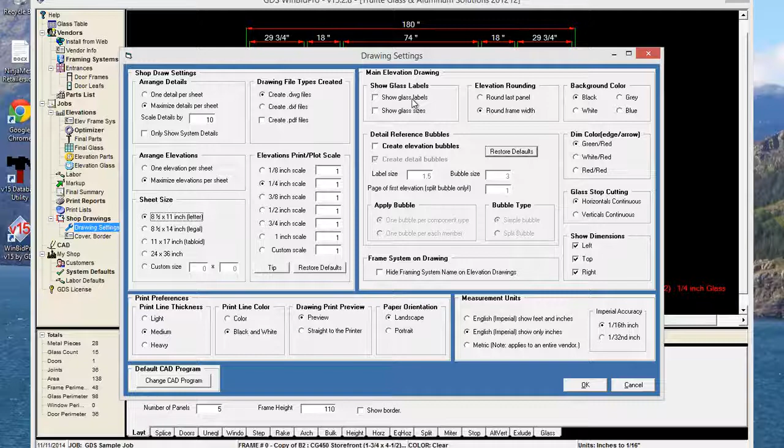And then there's all these other settings that have to do with the bubbles and the colors. Let's see, just different things with the drawings. This is showing the glass labels on the screen,

Glass sizes, things like that. So the main thing we're interested in is this shop drawing settings area right here. So let's leave it at that, quarter scale, DWGs, 8.5 by 11, and we're going to maximize both elevations and details. So we're using the Trulite catalog right here, and they have a good catalog that's configured very thoroughly with details, etc. So I have a job here with 3 elevations, and there's a pair of doors there, single door, not too big, about 200 inches wide on that one, 150 on that roughly, and 180 on this.

So here's what's going to happen if we do shop drawings. We're going to click on shop drawings, and that's basically going to compile these drawings and arrange them for the drawing files, the CAD drawing files.

So let's do that. Now the problem is, since 8.5 by 11 is our paper size, it knows that it can't fit all those at quarter scale on one sheet. So we're kind of not getting much advantage for our maximizing elevations per sheet.

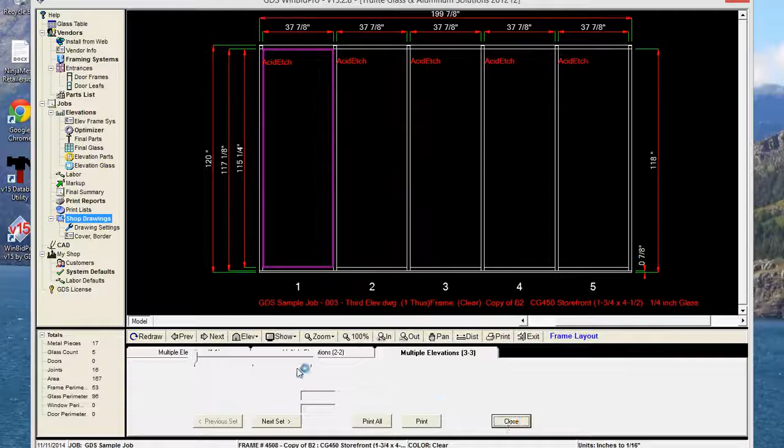So just to show you the difference here, let's go back to drawing settings and say that we have an 11 by 17 printer. With elevations of this size at quarter scale, it should be a different story when we hit shop drawings. It should be able to combine these now and put them all on one page.

So here they are on one sheet. It's basically because our paper size grew, the elevations can fit better. And then we can go to the next set.

And you'll notice this in a lot of the details for different manufacturers. It's kind of a challenge working with details from different sources because it's hard to tell what scale they were created in.

Especially when they're DWG files. We don't have a lot of access to the metadata, the actual information in the files. So I guess we're kind of treating them all like they're the same size, but in actuality they're not. So sometimes they'll show up tiny, sometimes they'll show up normal. It just depends on what the source is, which is the whole reason why learning your own CAD program is

a huge thing, because you can basically fix this. You can say, I want to scale this, or I just resize them to however you want, and then they look exactly how you'd like. So you're not having to work with something like this. That's one of the reasons it's important to know a CAD program.

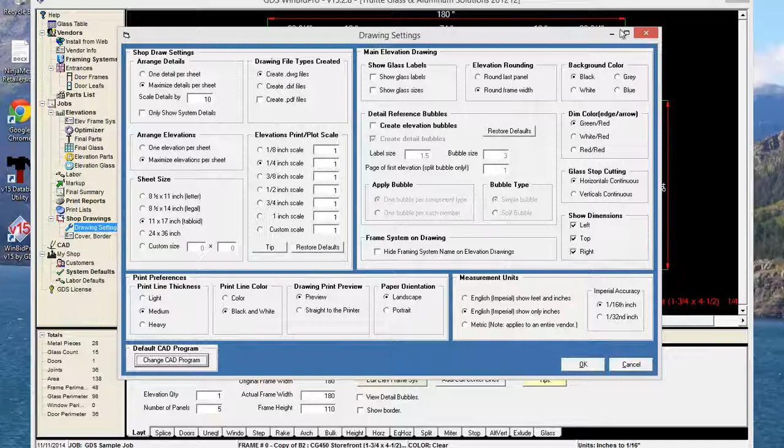Now this is a free program that the company we buy our software tools from gives us, the ability to draw elevations in our program. They have a little free program that they put together. The problem is the company's in Greece, and although they have a good tool, their little CAD program has some problems, and it's hard to get any help from the people in Greece. So it works, but it's not ideal.

So here's what that one's like. The way you open up the CAD program is just this little CAD button here. And you may know this already, but whatever drawing is showing on our screen here will get opened when we hit CAD. So this is the free program, we call it VCAD because we had to change it a tiny bit. But it's got all the tools and everything, but unfortunately there's some things that don't work right.

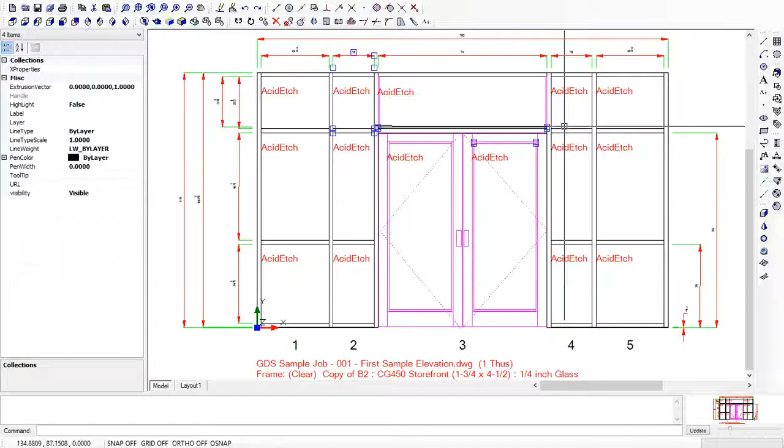It's not that intuitive to me. I'm clicking on objects here, which is good, or entities they call them in CAD. So if you're looking at just an elevation drawing, everything's in vectors, I guess. Horizontals are like little rectangles, verticals are little rectangles. Everything we draw is kind of rectangles, unless it's a rake, and you get into more angled stuff.

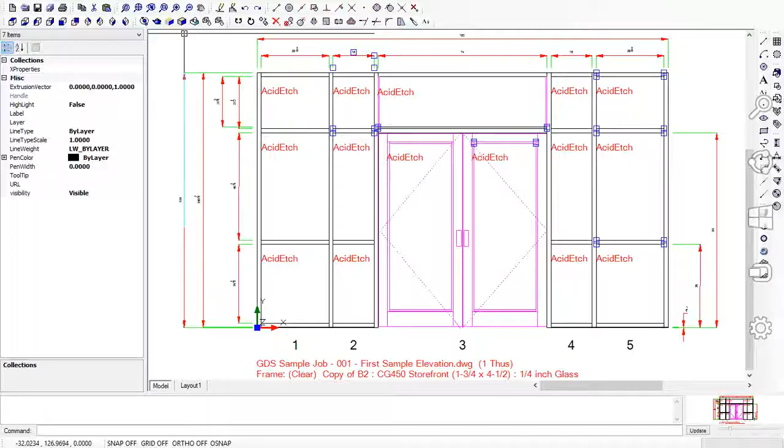This is what it looks like when you open the free one that's included with WinBidPro. Like I say, I'm not that pleased with it. I know it's better than nothing, but I would rather use something like DoubleCAD, so that's why. Sorry about that, I hit the wrong button. Let's go back one more here.

So what we're going to do, let's say we've installed DoubleCAD. It installs like any other program - you download it and install it. I want to actually tell GDS or WinBidPro that I want to use that DoubleCAD program. So I'm going to browse for it. And I remember that when it was installing, it put it in the Program Files x86.

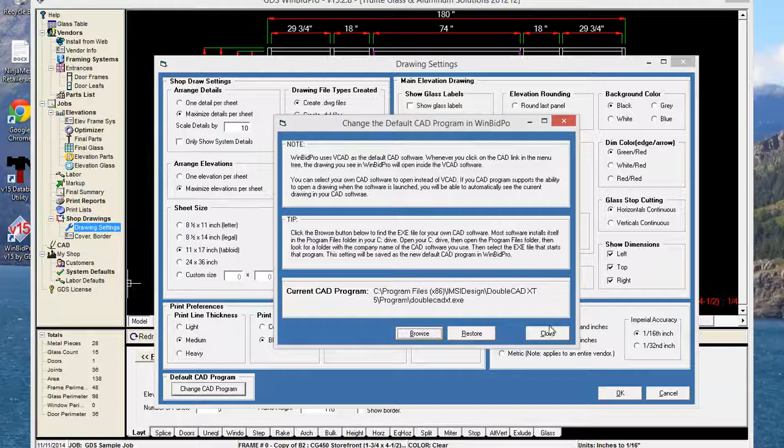Now I'm looking for the IMSI Design - that's the company that makes it. It's called DoubleCAD XT5. We open that up, open up programs, and all we're looking for is their executable file right here. So we click that file and say that's the one we want. It confirms that it selected it here and shows where it is. Now we can hit close.

So now let's go ahead and do our shop drawings. Now when I go to click on the CAD link here, it's going to open up whatever I've chosen on the screen. There, it compiled our details in the CAD program of my choice. So let's see what happens here.

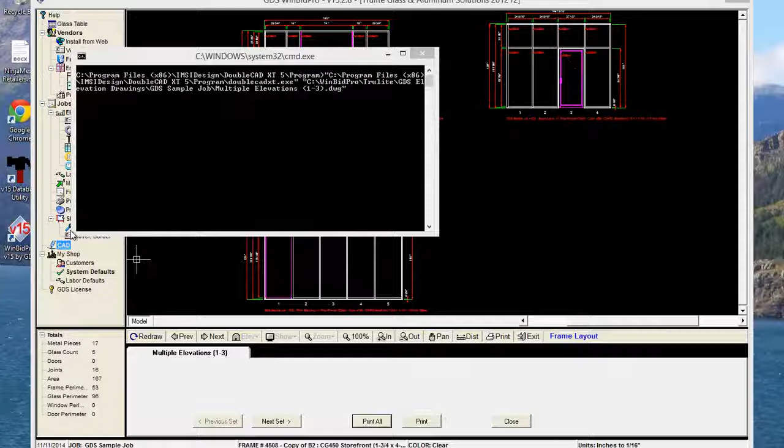It's a little bit slow the first time you open it, and you'll see what it does here. It has a little splash screen, I guess you call it, telling you about their Pro version, where to go for the website, and it's got little tips. I could click on this - did you know kind of stuff. So it's kind of cool.

And another reason this is better than the one included with WinBidPro is it has documentation. The one we got for free never came with any documentation. In fact, the help just doesn't even work, I think, which is not good. So here's what I like. By no means am I a CAD expert or a draftsman or anything close to that.

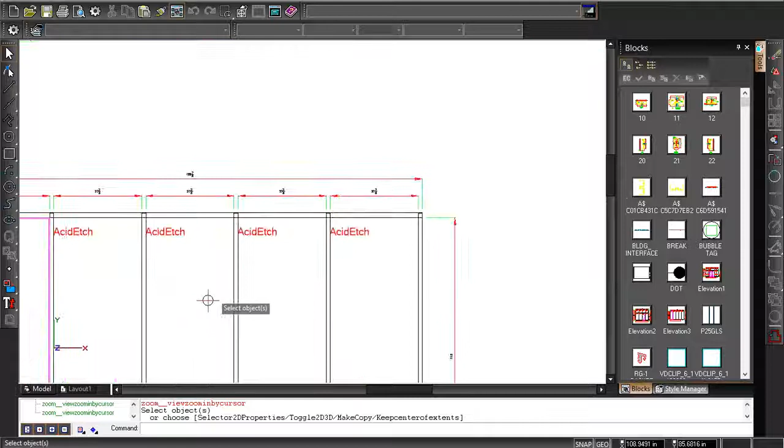So all I've done is figure out how to use this, and I just want to pass that on to you guys. One thing I like here is we've got all three of our elevations that are a little bit spread out. But before we do anything, you'll notice, let's say I zoom in, the letters for the glass are nice and big.

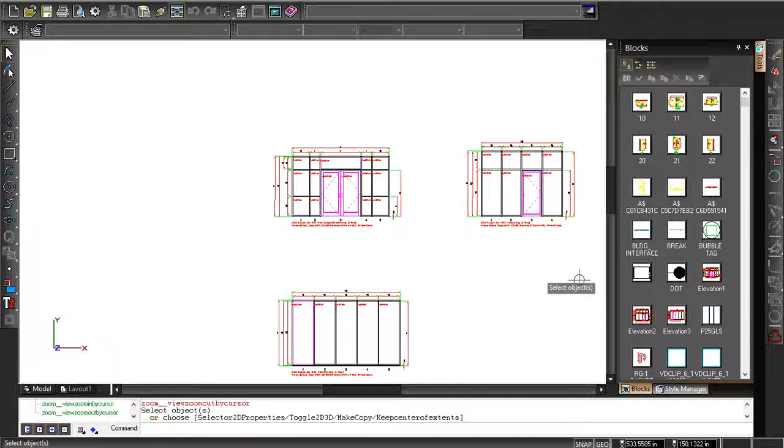When you zoom, you're just using the scroll wheel on your mouse, and wherever you point the crosshairs, that's the origin of the zoom. So it's a way to manipulate how centered your drawings are. If I zoom over here, it goes to the right. If I zoom over here, it goes to the left. If I point down here as the origin, it's going to go up. I think that even works that way in our software.

One thing about CAD software is it's very similar - if you're familiar with one CAD program, it's going to be real easy to learn another one. Every CAD program has a little command prompt down here, a command window, so CAD commands are very similar. AutoCAD was, I think, the originator of CAD, so everyone else has kind of copied what they did and just made little changes, but the concept's the same.

They try and use the same terminology, they try and use the same commands. There might be some variations, but it's nice to learn something that's a little more beginning level like this program, get comfortable with it, and then if you jump right into AutoCAD, I guarantee you'll have a good head start, and the learning curve's a lot shorter.

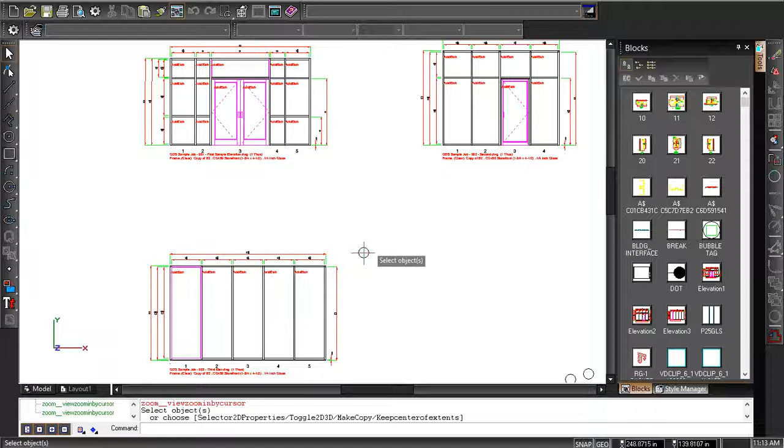So one thing I was going to point out was you'll notice our glass labels and our elevation and framing system names here are pretty legible, but our dimensions are tiny. For some reason this software, that's one thing about DoubleCAD, doesn't give you large enough dimensions, but fortunately it's fairly easy to fix.

Now one thing about CAD, and I like this program, is you can just hit Control-A and it selects every object on the screen, which is really cool.

So you'll notice that we don't have our details in here yet. I want to do this fixing the dimensions thing before we bring in our details.

So I hit Control A. Another option is I can drag or I can just click. What we've done is we've grouped or blocked all the different elevations. So I can click on these, I can hold down the Shift key, or maybe the Control key. Well, it's different when they're... okay. So here's another thing, I can drag and select. That was the same thing as hitting Control A.

So if I just click off of it somewhere, or even hit it, that didn't work. So yeah, there we go. Or you can hit Escape usually. Escape is a big key in CAD software.

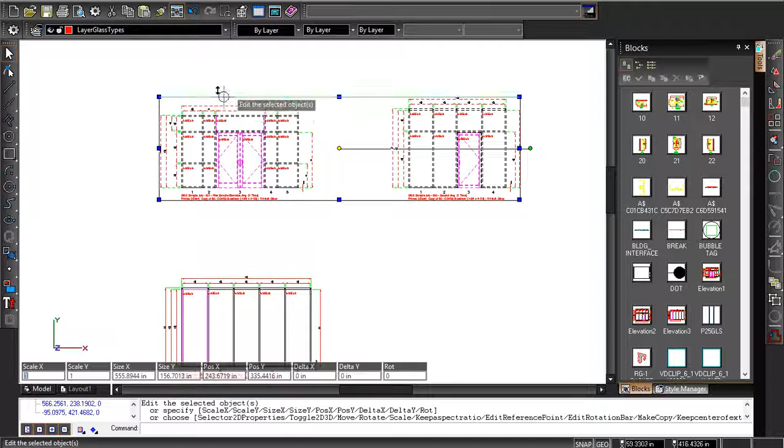So like I say, I can either drag. If I only wanted to select a couple, I could drag. You kind of have to get around everything. If I tried to select just by going through the middle, it doesn't like that. So if I select by going outside of it, make sure everything I want is inside this box, then it lets me do it. So the other option is Control A.

Now, one thing we have to do before we can manipulate some of the properties of these drawings is explode the drawings. So what we've done when we create a maximized elevation sheet is we've grouped all the elevations into one group, or one block I guess you'd call it. So we've made everything easy. Now the reason we did that is because it makes it easy to move things around in one piece.

Like you'll see, if I click off of here and I click this, everything's selected at once. So all these elevations are blocked as one. Each elevation is like one unit. It's nice when we want to move things around like this. But if I want to manipulate a property like the dimension text size, it's not going to let me do that.

So in order to do that, I select all my elevations I want to manipulate, and then I need to explode those. Explode is a common CAD term. We're going to explode those drawings. It doesn't really do anything, but you'll notice if I click off... ignore that error, I'm not really sure what that one is. If I click off, I can actually click individual pieces now, which is good.

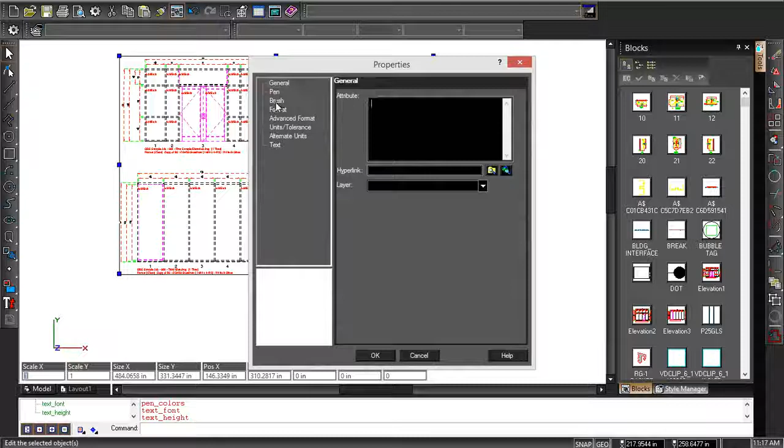But what I want to do is change the text size of the dimensions. So I can go over to Style Manager here, or I can right-click anywhere in this box and go to Properties. I like right-clicking because that gives you an idea what else is there, which there's a lot. So now we want to go to Format. When I go to Format, luckily all the things that are important to me are coming up. So dimension size and scale I'm not too worried about. What I am worried about is the height of the text.

So the height of the text is set at 1 inch now, and this is all relative to the units of the drawing. So 1 inch is kind of too small. What I've found is 2 or even 2.5 looks pretty good. So I can do 2.5. You can see this bottom left window gives me a representation of the change. If I go to 1, it looks small. If I go to 3, it looks big. So something in between, like 2.5, is good.

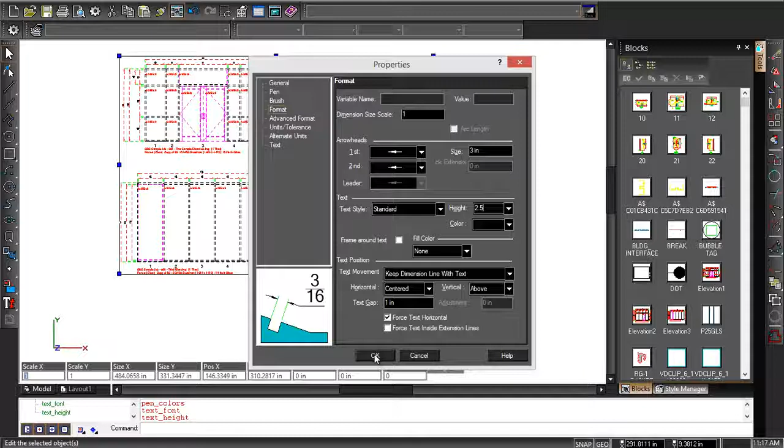So now everything that's selected should be changed to this new value, and you'll notice that the dimensions did get a little bigger. So I'm going to click out of this, and now when I zoom in, they look pretty good relative to the labels and everything else. So we've just fixed our dimensions. You saw how easy it was to click something.

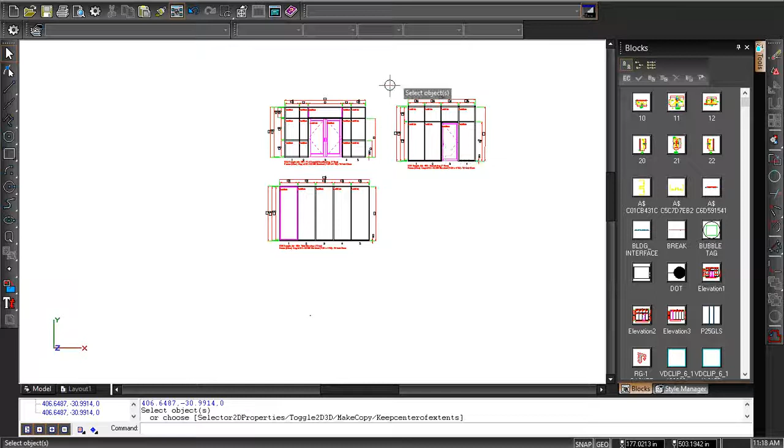Now actually what I can do is either regroup these or just leave them exploded. Leaving them exploded doesn't really hurt, except if I want to move a whole elevation now, then I have to select it like that. And it's really easy to move once I do that, but I have to drag around and select it first.

So now if I want to regroup something, let's go ahead and regroup this whole group of 3 elevations. It should make these all one group. So I can go up to, there's a lot of different menus here. For now, Format's an important one. Modify is an important one.

Dimension is, but our drawings are already dimensioned, so we don't really have to worry about that. So all we want to do is make a group.

I'm not sure what the difference between make group and make block is, but that's a good one. Because I'm pretty sure if I make group, then all I have to do is click on one elevation, and then I can drag it around, or I can drag that whole group around.

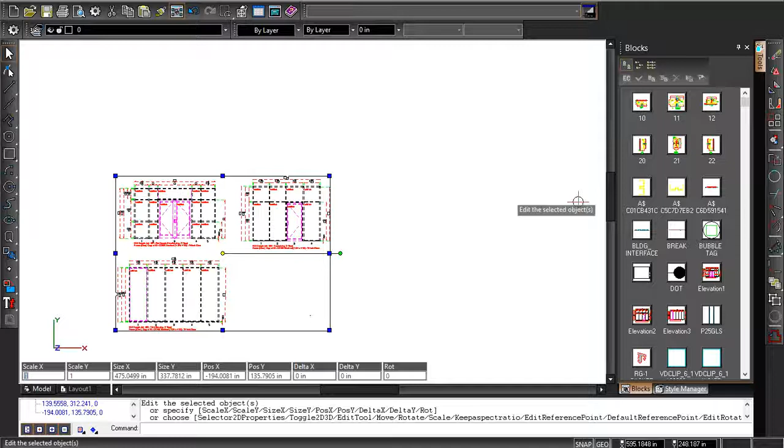So that's kind of cool. If I didn't want to do that again, I could always go over here to explode. I can't remember if explode is a right-click option here. Yeah, I didn't see it right away.

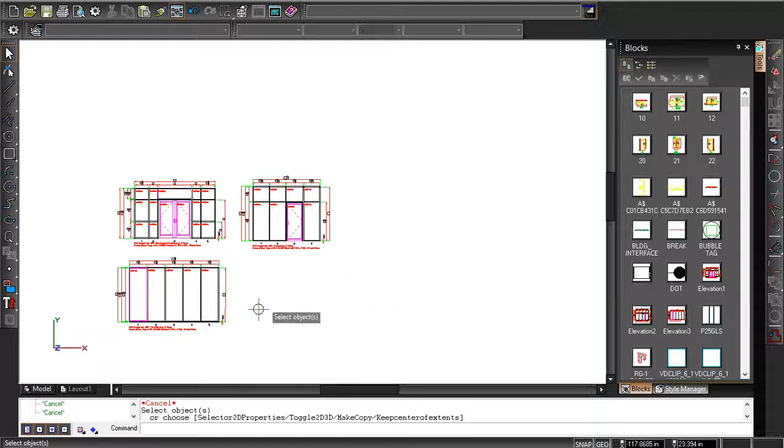Once you get into something like this and get comfortable with just doing basic things, then you're going to get a little more inquisitive and curious, and want to dig into it a little deeper. That's actually the ideal way to work with this kind of thing, just a little bit at a time you learn what you need to learn. Don't try and learn everything at once because there's just way too much.

So far what we've done is we've been able to move it around. We've exploded the drawings so that we had access to the dimension text, and then I grouped them all into one thing since they're all where I want them to be and positioned correctly. Now it's time to start working with some details.

You'll notice these details are blocks. So there's a couple things I can do. I can actually drag in individual details. This is something we've done in our software to make it easier to work with shop drawings.

You'll notice all the different elevations are individualized over here as different blocks, and each of the details are their own blocks as well, and there's even some separate details that are blocked out here. So blocks are something you can just insert into your drawing real simply. I can just click and drag.

So what we saw was easy because the program opened up the drawings and all we did was click CAD. But if you ever need to just open your CAD program separately and then go in and open a CAD drawing, you need to know where those drawings are.

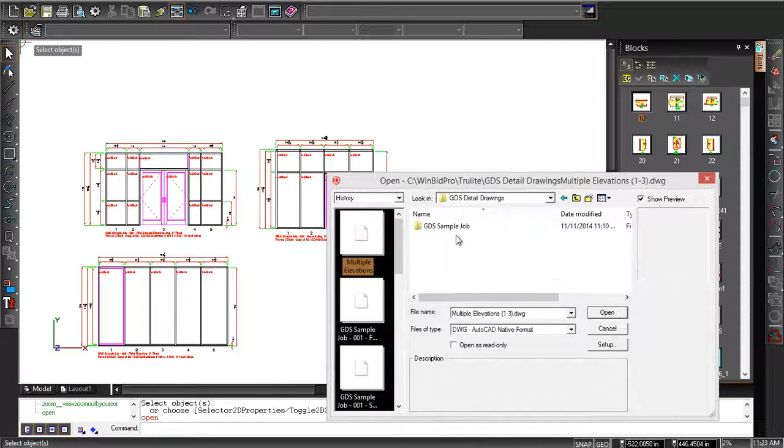So if we go to that and browse, my computer might be acting a little slow. We're going to go to where the elevation drawings are. Let's go up a couple folders to detail drawings, sample job. So this should be the file that has all the details in it.

And the details should be combined. This is something I noticed it doing once. It opens up a different drawing than we selected.

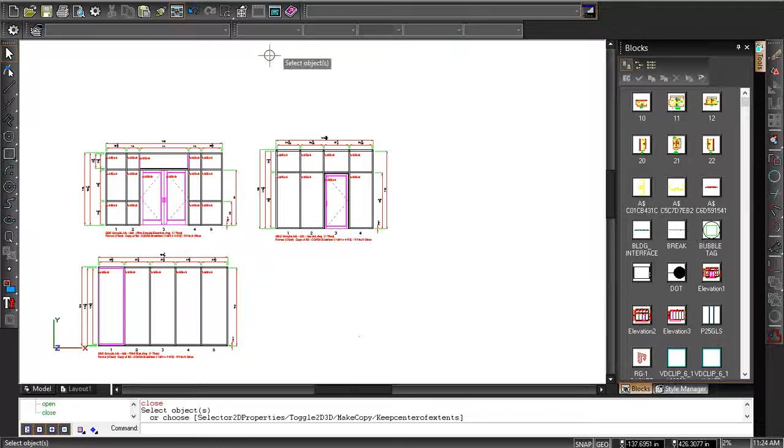Let's try something else here. Let's go back to our WinBidPro. So none of these CAD programs are perfect, especially the free ones. There's something weird I noticed it doing. It didn't open the actual file I was selecting, which I thought was strange.

Let's go back to here, and we're going to hit Next Set. So if we had 15 elevations and we still told it they were combined, it would create tabs that had, say, elevation 4 to 5 or 6 to 8, things like that. Each one of those would be a set, or a set would actually be a whole group of tabs here, and then you just click on the tabs.

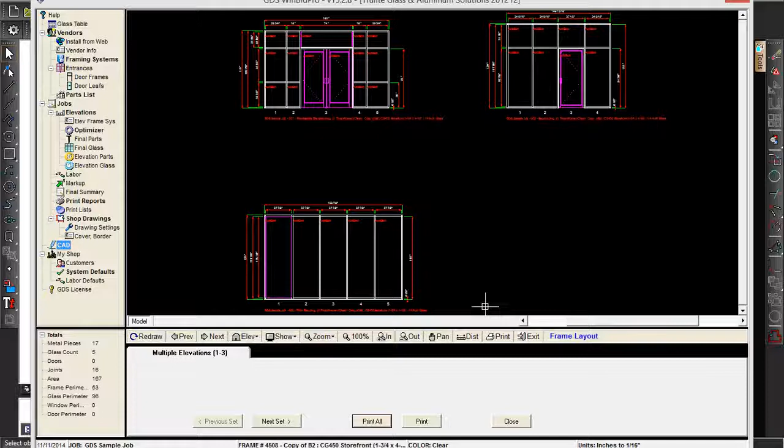So the next group of tabs would be details, and in this case it just combined all the details in one sheet. Let's go ahead and hit CAD again here and see if it opens up another instance of the DoubleCAD program. It might just open the file in the current DoubleCAD. Let's see what it does.

So this should do it. See how it's telling it what file to open? It's telling it the actual file name. Yeah, it looks like it opened up its own, another copy of it. Let me minimize this.

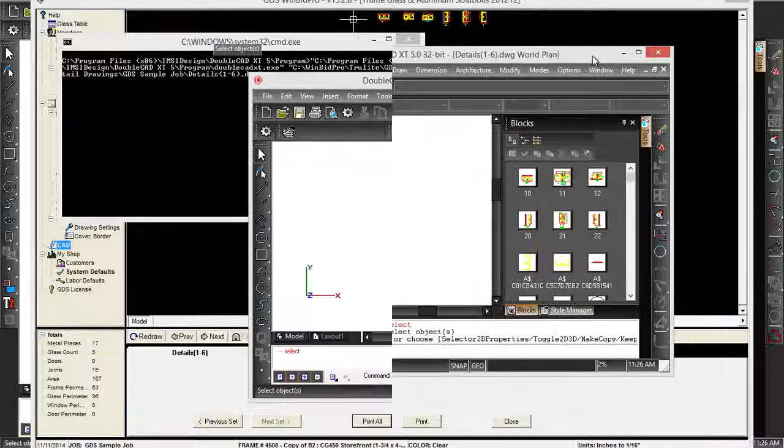So right now we've got two - where are we? Oh yeah, I can tell down here with Windows. So I've got two kind of versions of CAD running right now.

So the thing I want to try and do is copy and paste. Instead of individually working with these details - notice how I don't see the details anymore - I'm going to right-click, and there's another common CAD command called Zoom Extents. What that means is whatever file or drawings are on the workspace, make them fit on the screen. So that's what we just did here.

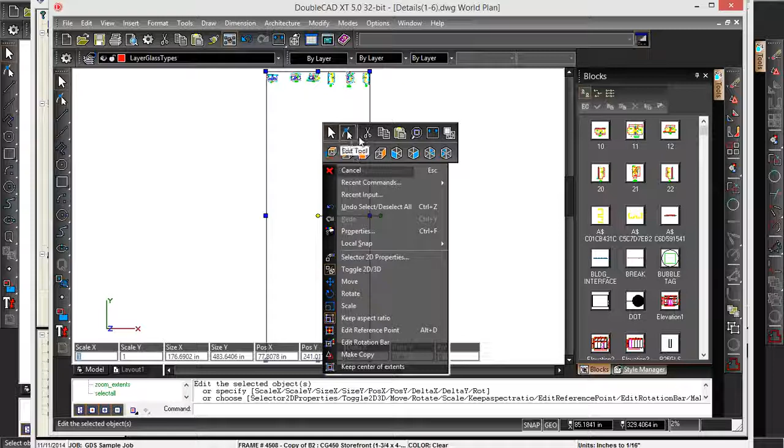Now I am going to hit Control-A. So it selects that. I'm not sure why it thinks they're so vertical. That's kind of strange. Then I'm going to right click, and I think I can copy here. Let's see, yeah, they give you the icons. I could probably hit Control-C, but let's go ahead and copy.

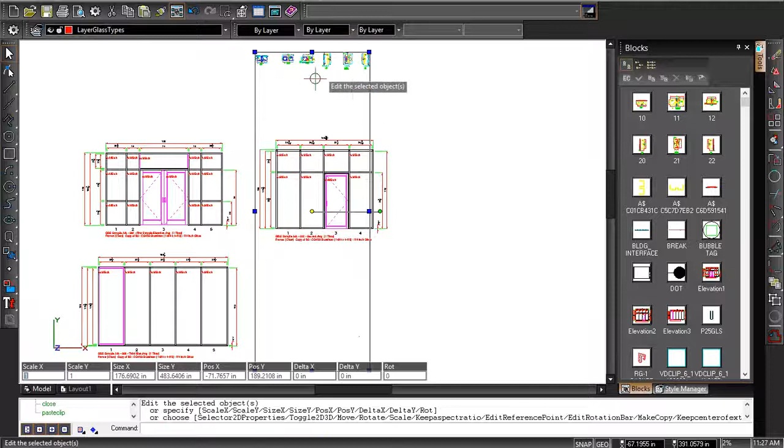Now I'm going to jump over to this other one, and I'm going to see if it'll paste. This warning comes up, and I always just hit yes, and basically it lets me do it. So I think to get it out of this weird looking box, I am going to - oh no, I guess it doesn't matter. I'm not sure why it made it think it was like that.

So here's something else we need to learn: the scaling of the drawings. Now, when I scale, the problem is when you scale your elevation drawings, it's actually changing your dimensions. So you definitely don't want to do that.

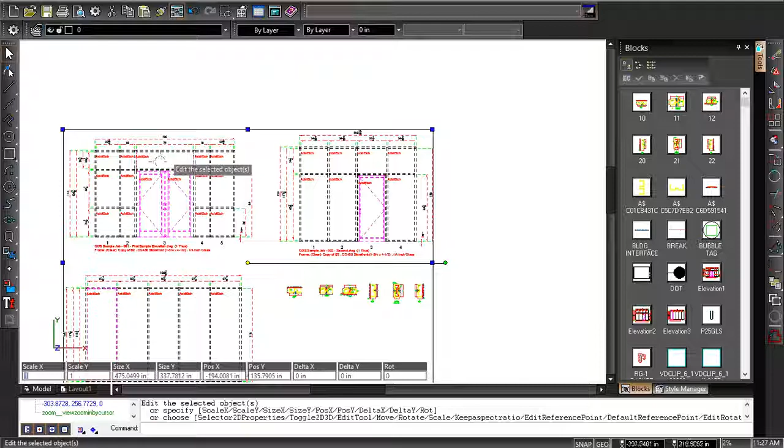Like this elevation here, it's 180 inches wide, right? So if I went and entered a different scale value down here, it's going to show a different width here because it made the elevation bigger, so it's going to change it to like 200 or whatever we change it to.

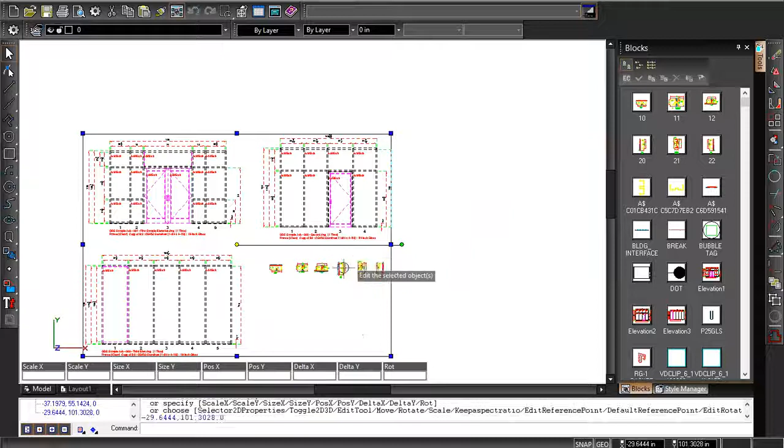But for details, it doesn't do that. Now notice how I can click the individual details - these aren't really blocked as one group. So I can select and move the different details, and maybe I'll move it over a tiny bit. Now I can select all of them and say move them down.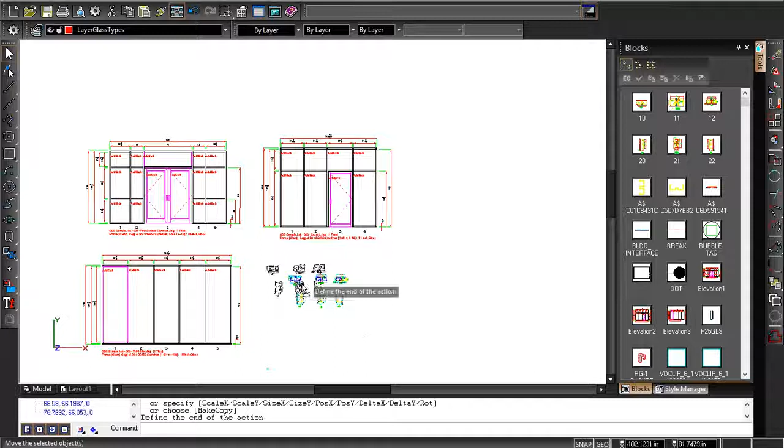Now with details though, it must be the way we create our drawings. Unfortunately, I don't know enough about CAD to know why when I scale these it doesn't change the dimensions, but when we scale our drawings it does. I'll try and get more familiar with that stuff later and have some videos covering more advanced CAD things.

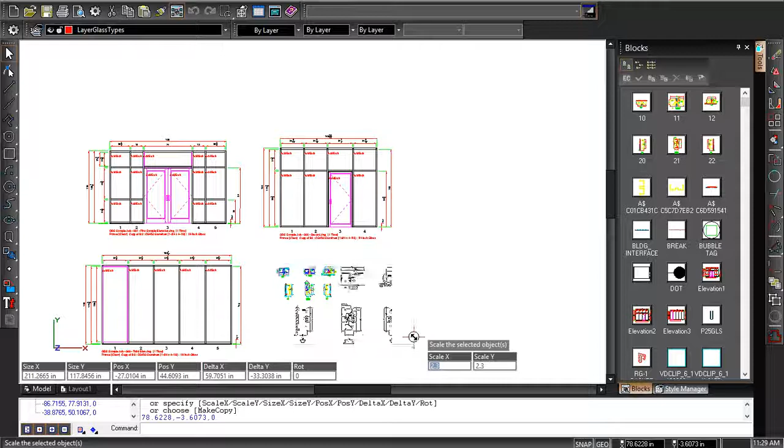But for now, it's real easy to just click and drag, which is totally easy, to make these details bigger. Or I can even go over here and say I want these to be double, and then I can tab. Let's see, did that work? Let's say 4. Well, no, I thought that used to work, so ignore that. The easiest thing to do is just drag because that resizes them.

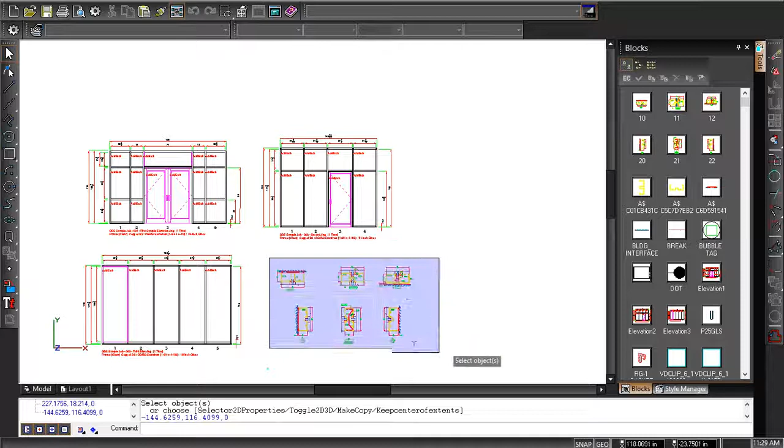So now I've got a decent looking shop drawing page, right? So there's one thing that we haven't done, and I'm not even going to bother saving that right now. Let's go ahead and close this.

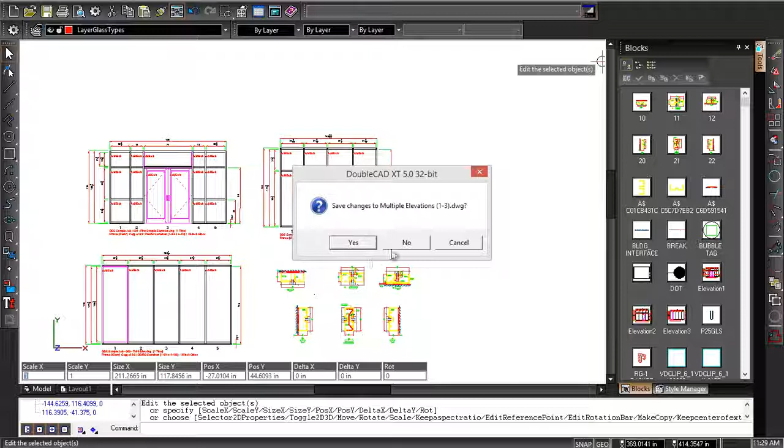But you saw how easy that was, right? I didn't have to explode these because it already let me work with them individually. I'm not going to need to click on individual elements here. If I needed to click on, say, this name, this text name of this detail, I'd have to explode the drawing, and then it would let me.

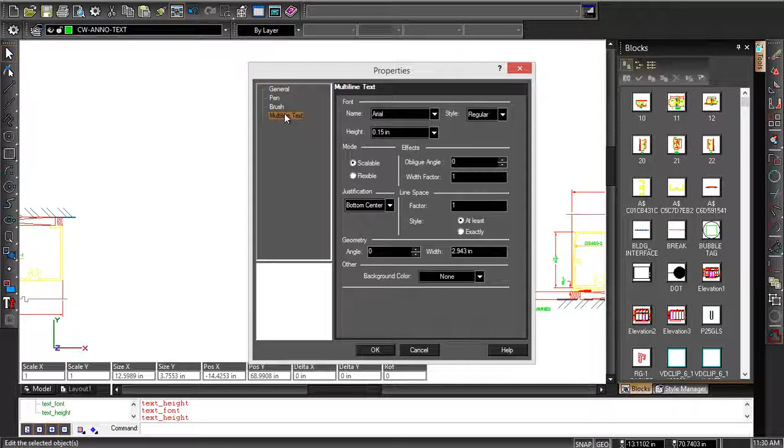So let's just show you that real quick. If I hit explode on that, now I can click on just that text object. And if I double click on that, then I believe it opens up an edit window. Multi-line text, where did that go?

Yeah, this is something I messed with a little bit but haven't seen. Let's see what we do here. It's thinking edit tool. I think we have to get to a text tool actually to do that. Let's see if we go over here. Define insertion point. Yeah, so I got to a text tool as opposed to just this select tool.

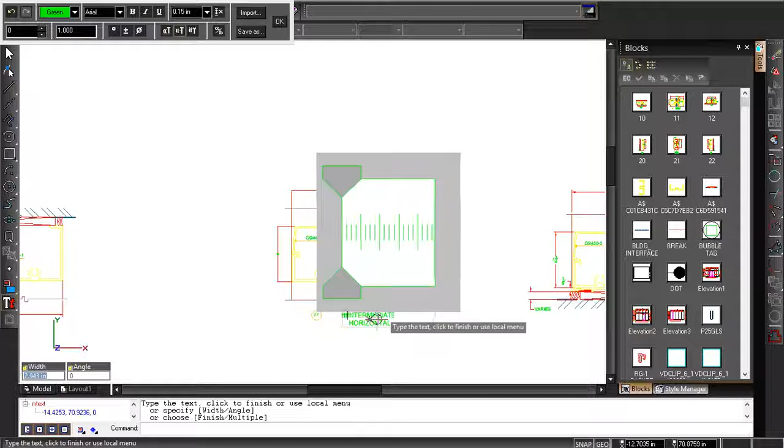And this is multi-line text. You can see how it's on 2 different lines. So basically it's letting me add to that now. I can edit that text object now, or change, delete it, whatever. So that's kind of what the explode thing does.

Now I can say, all right, I'm done messing with that. I think I'm going to group that back. That was under format, and I can just say make block. Oh, I see what make block does, it gives it a name. So I don't really need to do that. I just want to group it again.

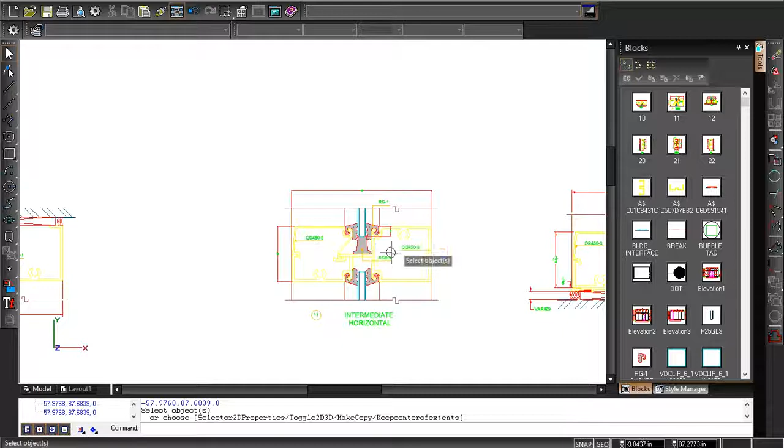So now if I click on it, it should select the entire thing again, which is what I want because it makes it a lot easier to move. So, okay, remember, I can right-click, hit zoom extents right here, or I believe there's that icon somewhere else up here. There it is up there. So you'll get familiar with where the icons and tools are and all that kind of thing.

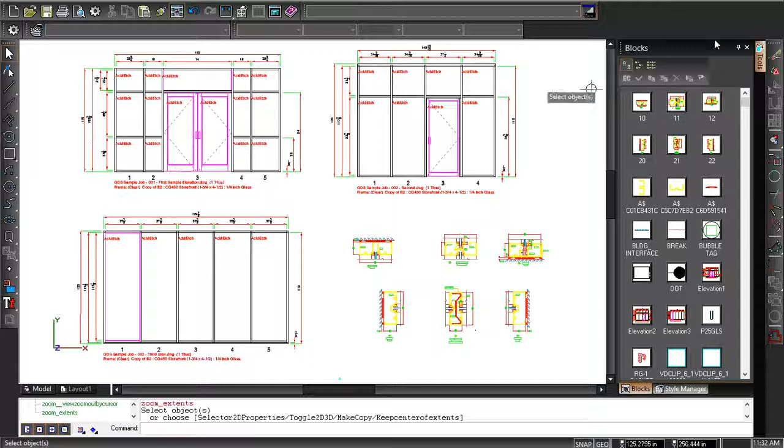So let's just go ahead and quit out of this. I know we're running out of time. I'm going to quit out of this one. I know I said that we'd talk about the border feature.

So a few versions ago we added, it used to just say cover here. You can do a cover page and you can do a border. So a lot of the information is the same actually. So the project name would be Beach Grill.

Cafe. So the address is whatever, Beach Boulevard. And then it fills in some of this stuff. So you'll see the name of my company, the catalog name, the job name, who's working on it, and revision dates, et cetera. So I can actually tell it what size cover page I want to do, and I believe I can tell it what size border. Oh, I think that actually determines the border size too.

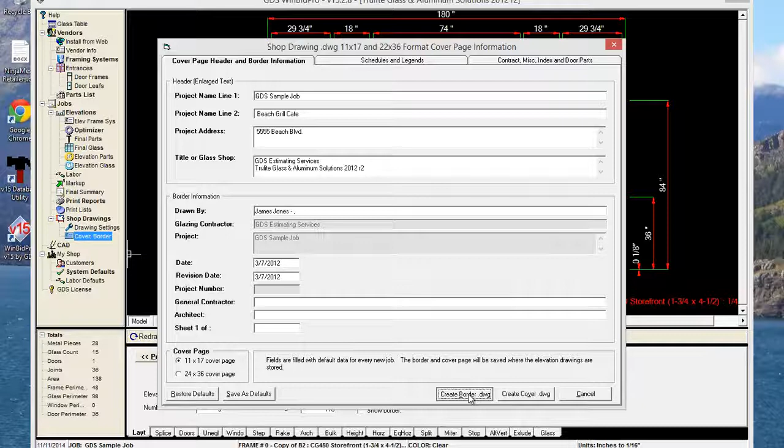So we're going to hit create border DWG now. And then we're going to hit, so it shows us that. I can either print that just the way it is from here, or I can hit close. It should have created this file. So let's go ahead and see real quick where it put that.

So if I go up to Trulite, it should be under the elevation drawings in the sample job, which it's not. Where does it put that? Well, let's see something here.

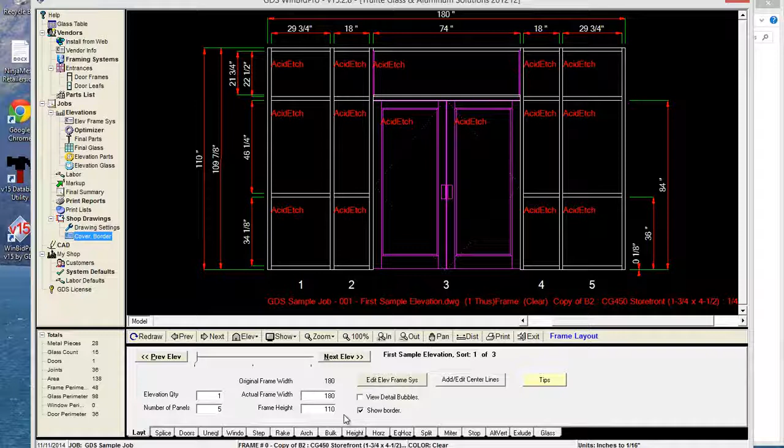So another way to see this is to hit show border down here at the bottom. If I want to just show border for this one elevation and hit redraw, that's kind of what we've implemented. Now the problem is it didn't use that information that we saved.

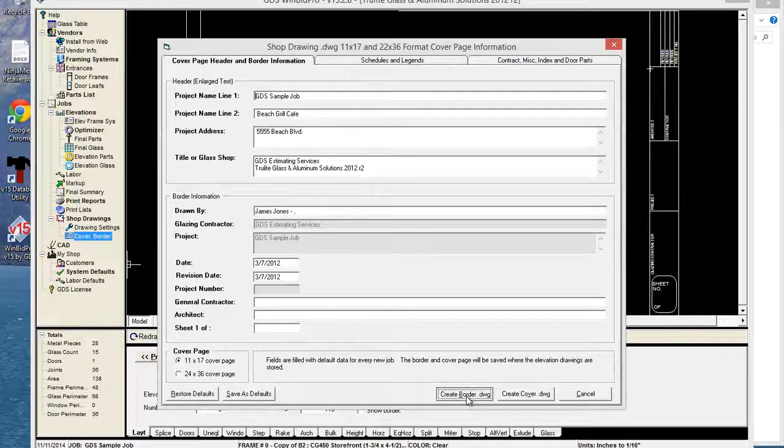So let's get back to this border stuff. Okay, so it kept all that. Create border DWG. Now that should be, oh yeah, so it knows. Oh, so the edit save button here is just opening the CAD program that we've associated to it. And again, it's kind of slow opening up the first time.

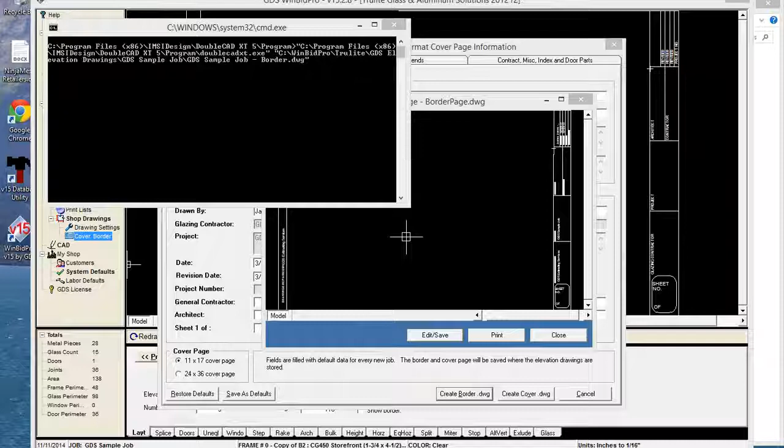So here's the border, and it's got the things filled in. I can zoom in here. So the project name, contractor. I didn't fill these things out in the other thing, but so it's definitely saved it and opened it here.

Now, one thing I can do is you saw how we could just go and open up an elevation file, right? So we could say open. It's almost like I have to double click that. That's kind of weird.

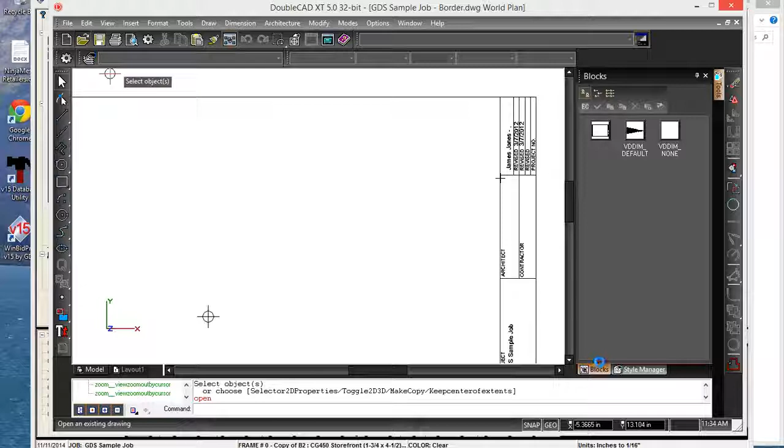Because when we just opened that, there were no blocks here. The blocks are created when we hit the shop drawing feature. So I can go here to the multiple elevations. Oh, there's the border. So now it created the border.

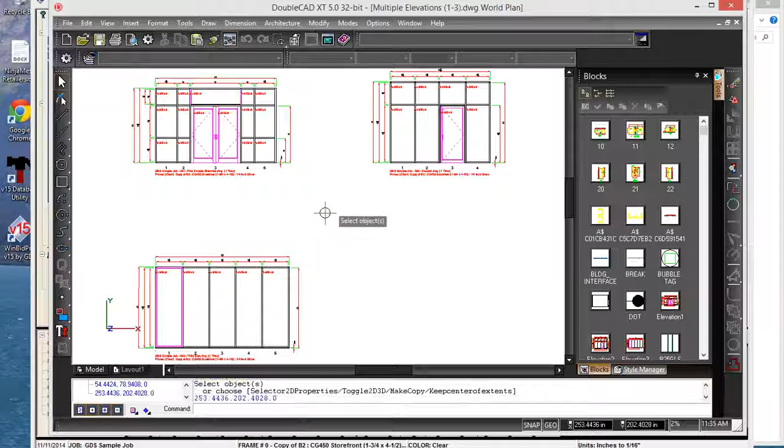So the border's already open. I can open my multiple elevations. And that's a separate file though, so remember how we have to move these around a little bit. Now these are blocked, so I'm going to move this up here. I just want to get them close again.

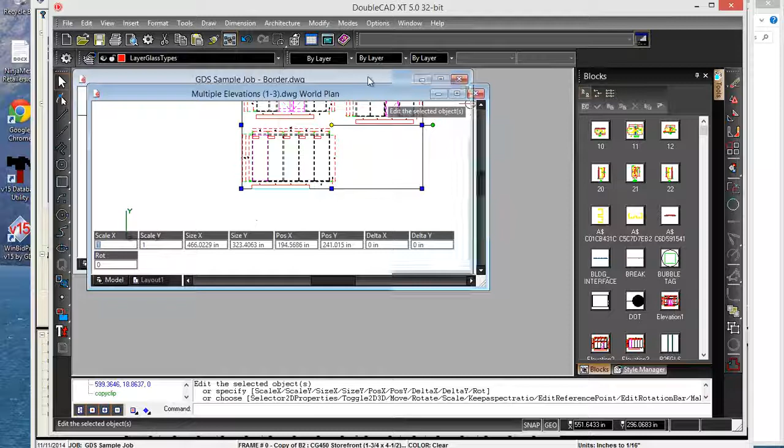This one over here. So now what I'm going to do is select, I can hit Control A, or I can copy these and then go back to the border window and paste them. So this is where I want to hit zoom extents too.

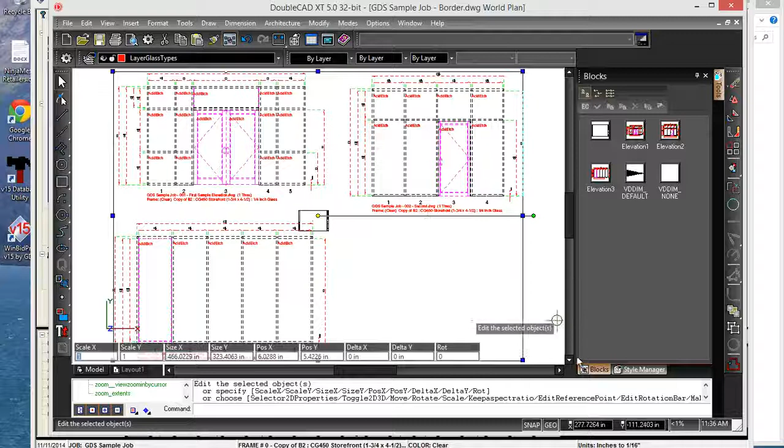Where was that? I'm going to right click and do zoom extents. Okay, well clearly I should have played with that more. So for some reason my border's gone. Interesting. Yeah, now I have two sets of the 3 elevations. Okay, I'm going to close this.

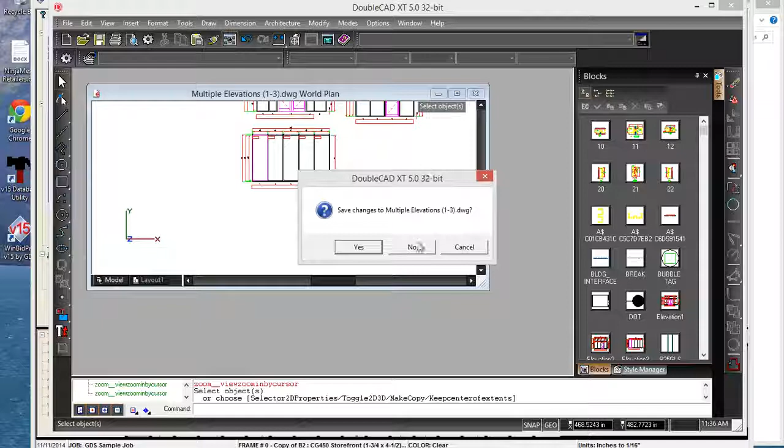Here's another option. So you'll have to play with, let's see, show border, redraw. There we go, so I just had to redraw. Once it saved it, it filled in everything.

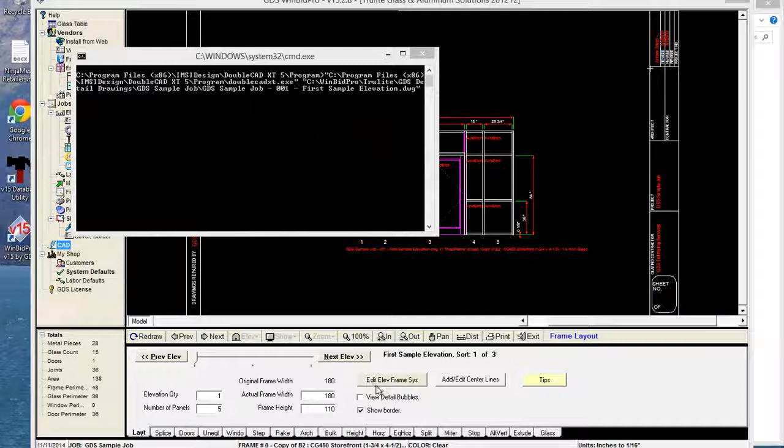So now I should be able to, with this border, I can do this, I can go to CAD. And now the problem is the border is not working with the shop drawing tool right now, so it's kind of one or the other. And as I say, the border saved as a DWG file. I think what it might have done was covered up—it's kind of like that when you're in a drawing program and it puts something behind and something in front.

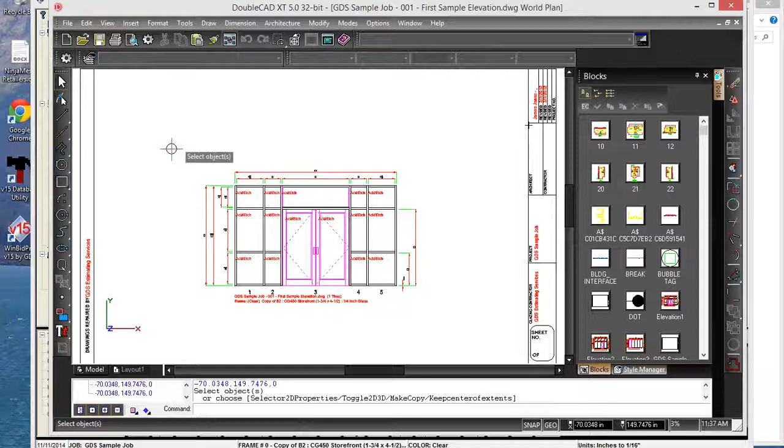Might have to start playing with those features on it. So one option is, let's see here, I might have to, let me hit Control A. I'm going to explode this. And then I'm going to move this elevation drawing around.

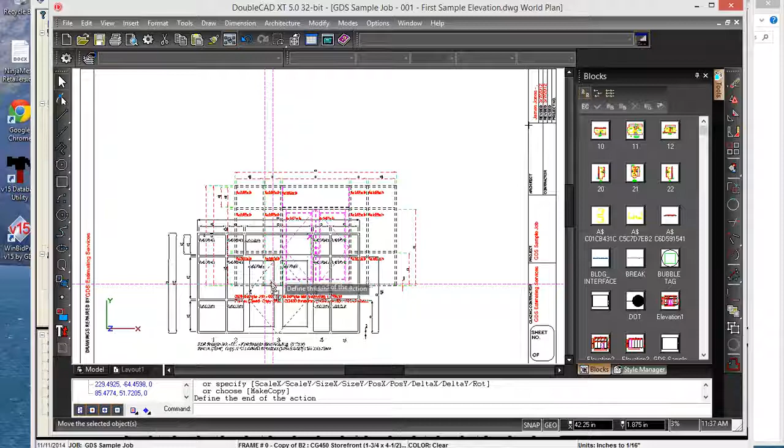And, oops, so I'm going to select that. So if I wanted to, I should be able to do this. Now notice that the blocks are over there now, which is good. What is this, my first elevation? So I'm going to push it up here at the top.

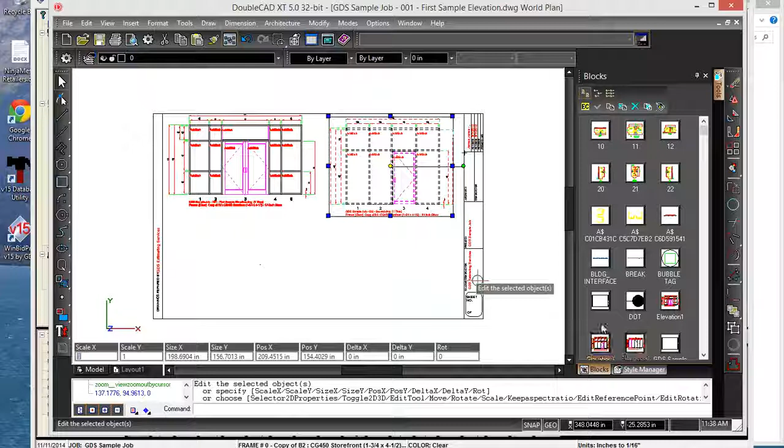So now I can go ahead and go over here like I was going to work with the blocks before. I can go ahead and just insert this block here, and then I can take the third elevation, insert this one here. So that's pretty easy, right? Same thing with the details.

Now the details are scaled a lot differently. Remember how they were so small? So I can bring those in just like that. I can select those, let me try the scale now. Yeah, it's kind of interesting, I could swear that scale stuff was working before.

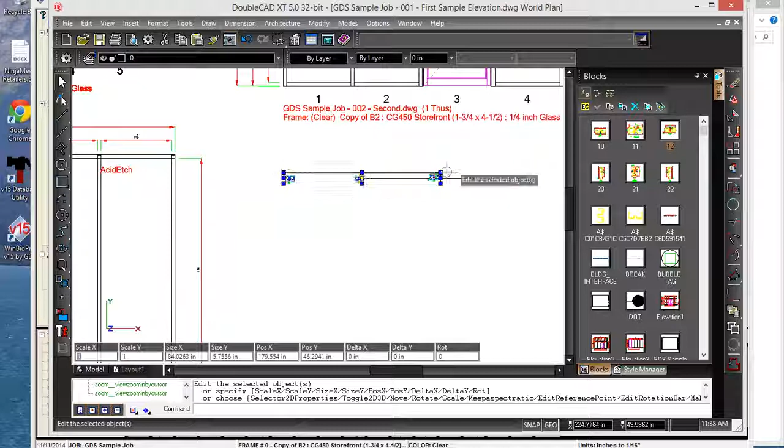But what we can do here is look for the—I'm looking for the little tool that lets me drag it, yeah, to make them bigger. It lets you do it when it's individual. That's strange. So I can individually make these bigger, I guess. So anyway, I'm making these bigger right now.

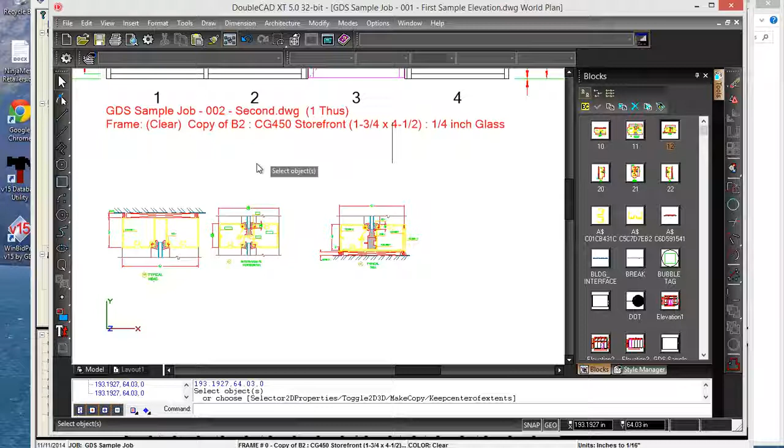So this is how we're, now I'm going to zoom extents again to see everything in the window. So you can see how we're getting a lot more of an actual shop drawing. I can go here—we're definitely out of time now.

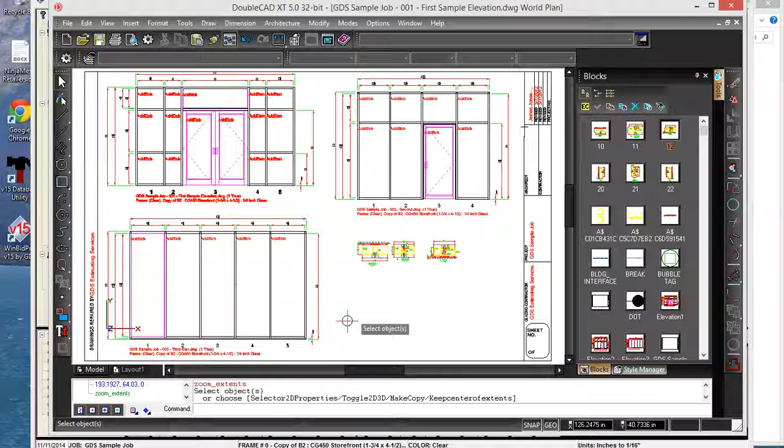So the next video is going to be taking this a step further, working with text and then figuring out the printing aspect. Printing is not—the one surefire way to print something like this is just to have it fit the page. It's not going to do it to scale, but it is going to fit the page. Because if this is set up as 11 by 17 and you need to print it on 8.5 by 11, it's never going to be to scale anyway. So fitting the page would at least get you what you see here. Keep that in mind.